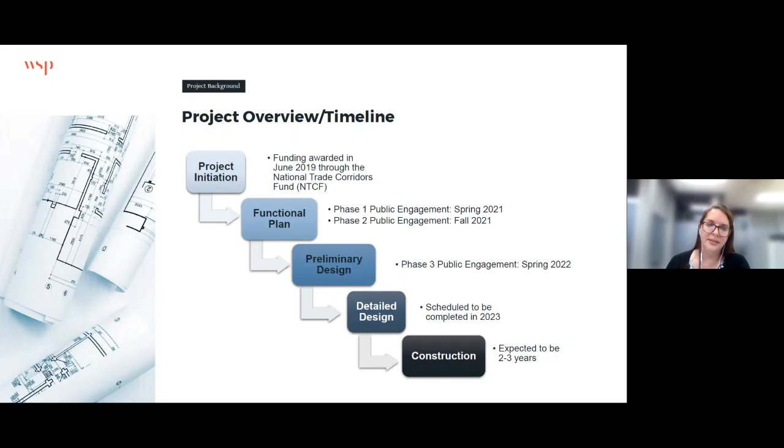We will gather feedback on the preliminary design before moving forward into detailed design. The detailed design will be completed in 2023, and this involves the details of where infrastructure will be located and the development of construction drawings. Construction is expected to take 2 to 3 years, and we are planning to begin in 2024. Details on construction timelines and impacts will be shared after the design is completed.

I'll now hand it over to Jenny Lugar with WSP to share a bit of the project background.

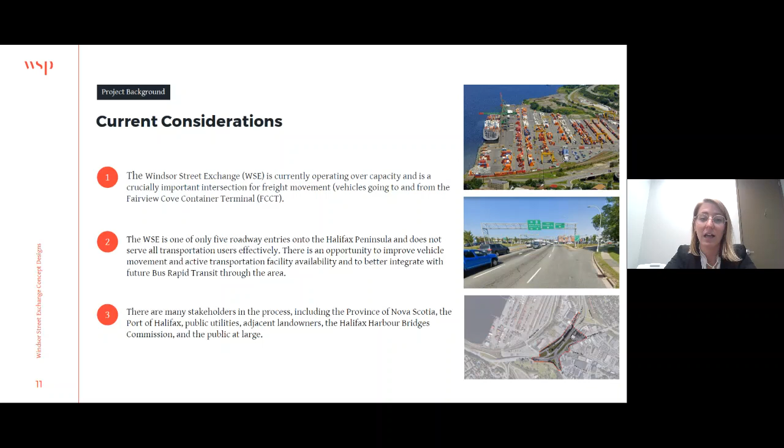Third, there are many stakeholders in this project, considering the different landowners and interests around the area — including the Province of Nova Scotia, the Port of Halifax, public utilities, adjacent landowners, Halifax Harbour Bridges Commission, and of course the public.

Here is our project study area. It has two key intersections. The first is the Windsor Street Exchange, where the Windsor Street ramp to the McKay Bridge meets the Bedford Highway, meets Windsor Street Exchange, and meets Lady Hammond Road. There's a secondary intersection we're looking at here at Lady Hammond Road and Kempt Road.

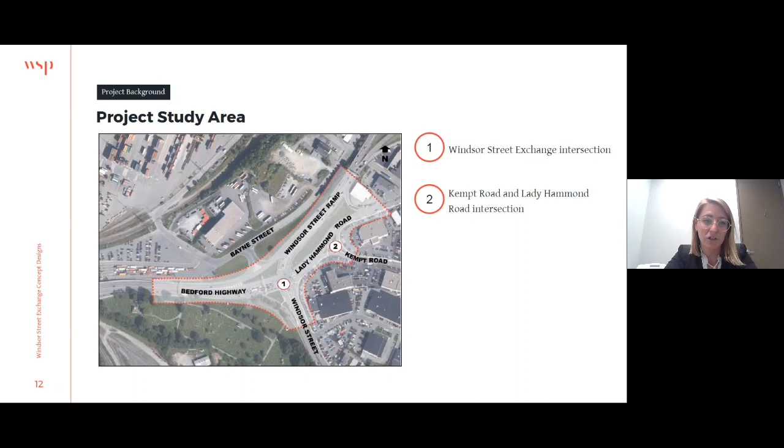As you'll see when going through the options, there's a third intersection that comes into play once we look at the usable area for this redesign — the Bayne Street intersection, where the Windsor Street ramp and Bayne Street intersect.

The scope of the study is fairly broad, balancing many different objectives. First, how to improve safety for all road users — people driving, walking, cycling, carrying goods. Next, how to improve efficiency and functionality of this intersection for vehicle and goods movement. Third, how to enhance user experience and safety for people walking, rolling, and cycling. We recognize this hasn't exactly been a user-friendly or safe experience for many people.

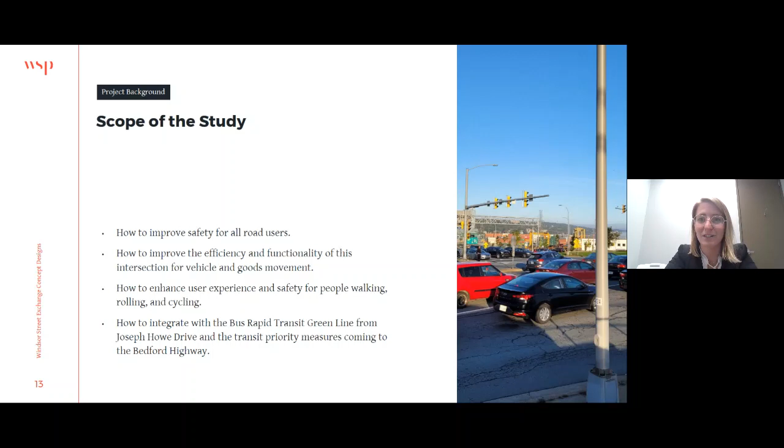And finally, how to integrate with the Bus Rapid Transit Green Line from Joseph Howe Drive and the transit priority measures coming to the Bedford Highway. So there are lots of competing interests here, and we're doing our best in the options to balance both — you'll learn more about that in a few minutes.

Regarding project integration, this is important because this intersection connects to many different parts both on and off the peninsula. First is the Bedford Highway Functional Plan, endorsed by Regional Council in 2020; HRM staff has been proceeding with the design to establish a formal right-of-way based on the balanced modes option — similar to what we're looking for here, a balanced approach. The Windsor Street Exchange project will connect to the Bedford Highway to meet the objectives of both functional plans, keeping in mind roughly where these two projects meet in their scope areas.

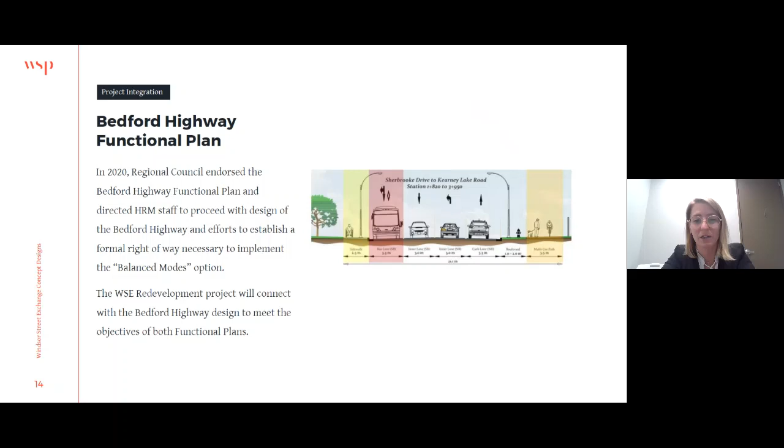The next is the Rapid Transit Strategy, also approved by Council in 2020. It aims to provide bus riders with fast, frequent, comfortable, and high capacity service. As I mentioned earlier, the BRT Green Route will run through the project, integrated with it, and will eventually run through the new Windsor Street Exchange.

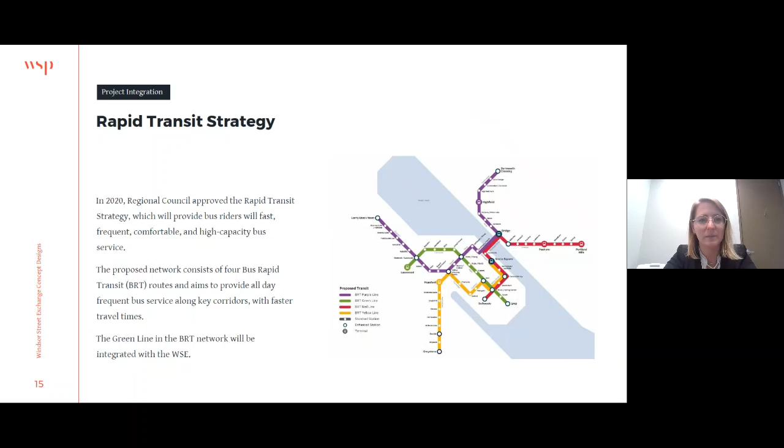Africville Active Transportation Connections project is an ongoing project that, due to its proximity to the Windsor Street Exchange, is being considered in tandem, which has been a great advantage.

Initially, this project looked at 3 potential routes and did some preliminary engagement with the community. Further engagement is ongoing right now. The project team has narrowed it down into a preferred route and is looking for feedback on this route. There will be some further discussion later on about how to potentially connect into Africville from our subject site for the Windsor Street Exchange.

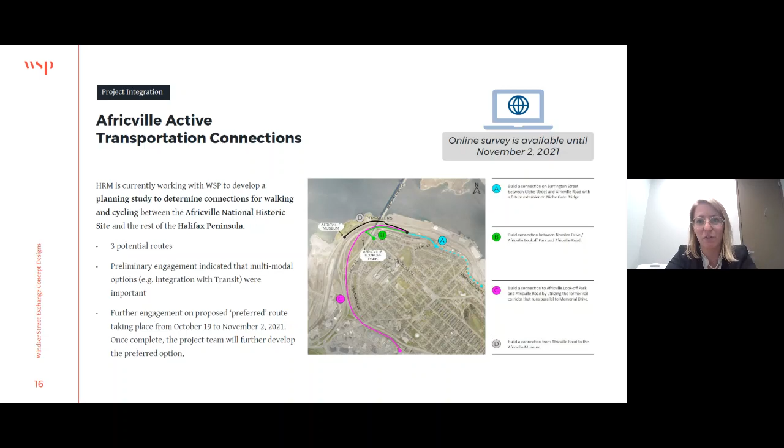But for this project specifically, there is an online survey available until November 2nd. That's available on the Shape Your City page, which can be accessed through the Windsor Street Exchange Shape Your City page, which we'll have a link for at the end of the presentation here this evening.

So I'm going to review a little bit of what we heard from our phase 1 of public engagement.

We had really excellent feedback from the first round of engagement. We had 1,459 individuals contribute to the online survey, give us their feedback that way. We had 30 individuals who attended a virtual public open house similar to the one that we're having this evening. And we talked to over 20 different stakeholders, including groups and individuals who, based on various different interests, have a special stake in this project.

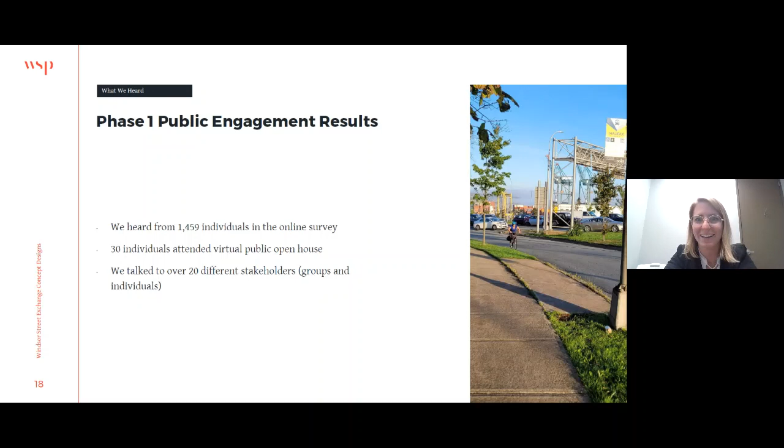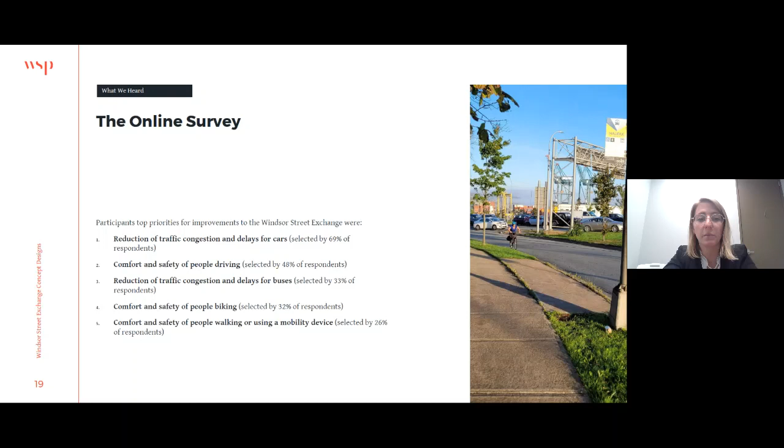In the online survey, we asked participants to rate their top priorities for improvements to the Windsor Street Exchange. In order, those were: reduction of traffic congestion and delays for cars, the comfort and safety for people driving, the reduction of traffic congestion and delays for buses, the comfort and safety of people biking, and finally the comfort and safety of people walking or using a mobility device.

We also asked participants in the online survey in the last round to look at trade-offs and how you might balance all these different modes that are competing for space and for priority through the Windsor Street Exchange, in recognition that there's a finite amount of space in this area and there's a limitation to what types of modes we can accommodate with this finite space.

When asked this question, 43% of individuals who responded to the survey were in support of increasing or maintaining private vehicle travel times in order to improve bus travel times. 46% were in support of increasing or maintaining private vehicle travel times in order to improve safety and comfort for people walking or using mobility devices. 42% were in support of that trade-off in order to improve safety and comfort for people biking. And finally, 32% were in support of increasing or maintaining private vehicle travel times in order to improve travel times for the transportation of goods.

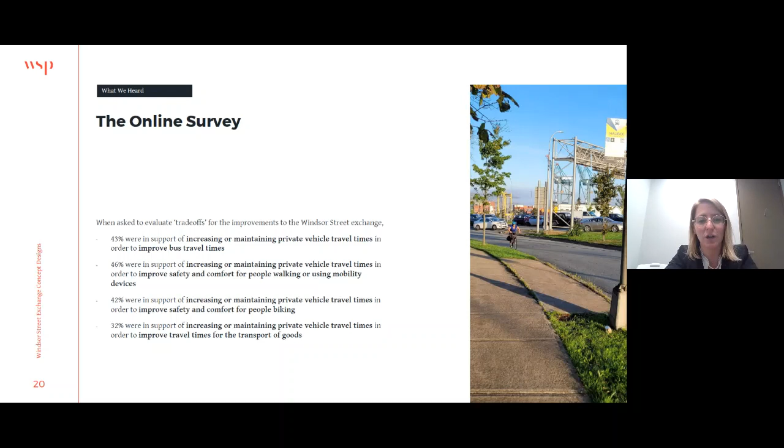That helps give us an idea of where we might allocate different attention and priority, and that's going to be looked into further with the project team as it advances, once we're narrowing down the different benefits for each option.

There was also an opportunity on the Shape Your City webpage to participate in an online mapping survey. This survey allowed us to collect geospatial or geographic data in order to understand specific pinch points, areas of concern, that sort of thing.

The feedback we got from that was significant, but a lot of the common themes were: some participants felt the project should increase safety for all users, while others felt that private vehicle movement should be prioritized as that's the highest volume user in this area. And then others felt that on the flip side, vulnerable users like active transportation users—people walking, biking, rolling—should be prioritized due to their vulnerability.

Another common thread was that better signage and infrastructure is needed at the Windsor Street Exchange, so directional signage and infrastructure in order to meet different needs for people traveling in different directions, and we will address some of how our options have addressed that later on in the presentation.

The third was that individuals who walk, roll, or bike rarely use the Windsor Street Exchange due to the lack of safe infrastructure. This was brought up a couple of times in the online survey as well.

Individuals were asking the project team to keep in mind that we may not get the feedback we're looking for in terms of the volumes of people who are walking, rolling, and biking because of the state of the infrastructure right now. And there was hope that the project team would be aspirational in hoping to get more people able to walk, bike, and roll through this area.

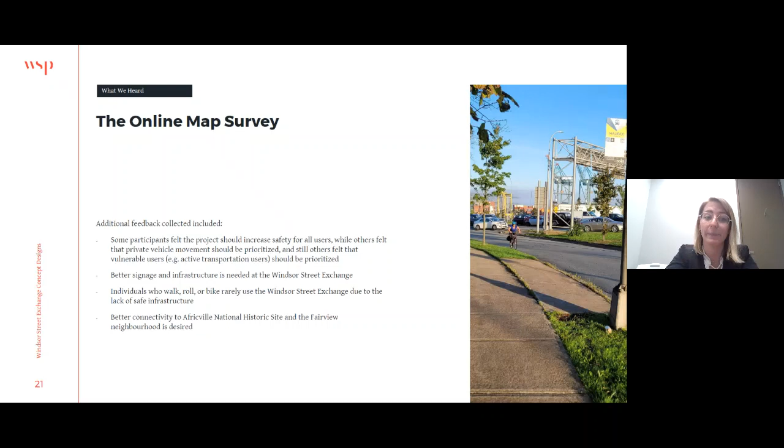And then finally, better connectivity to the Africville National Historic Site and the Fairview neighborhood were two things that came up a fair bit when we were looking at locational data for this project.

I believe this is a repeat. Could you go to the next slide, please? No, it's not. Okay, sorry.

Good evening, thank you Jenny. I guess what we've been waiting for is to see what we've been working on since the meetings mentioned earlier in the spring. As was mentioned, we have two options we're presenting this evening. So what I'll do is walk through the first option, what we're calling option A. Very innovative naming.

Before we got to option A, we did look at a lot of different concepts. We met with the HRM project teams and reviewed different ideas for improvements to the area to separate different traffic flows. A few of these are presented here that we looked at during the concept stage, looking at traffic volumes to see what would work and what would physically fit in the area. An interesting one that showed some promise was a displaced left intersection that moves a lot of the heavy volumes away from the main intersection, but keeps everything without overpass structures. That did require a lot of land, which was quite constrained in this area. Some other larger options were grade separated with bridges to separate some of the higher volume movements, really seeing what other options would work to fit into this area.

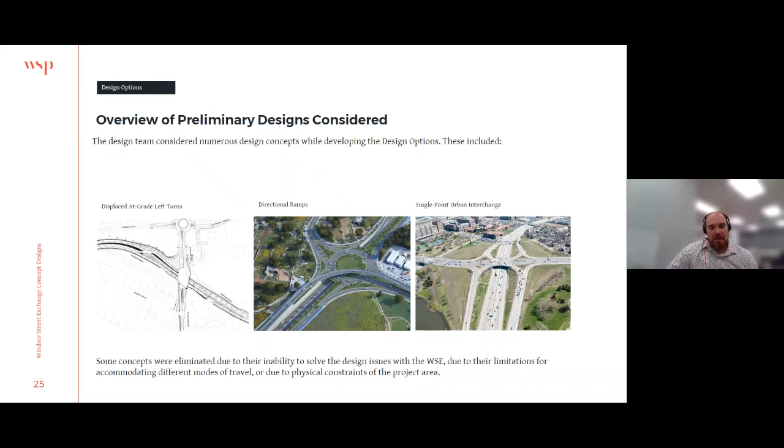The two options we're presenting this evening were really a combination of some of the features that were working well from the concepts we worked through, and some of the areas where we had other challenges, pieced together to get the two options we're presenting this evening. So now, option A.

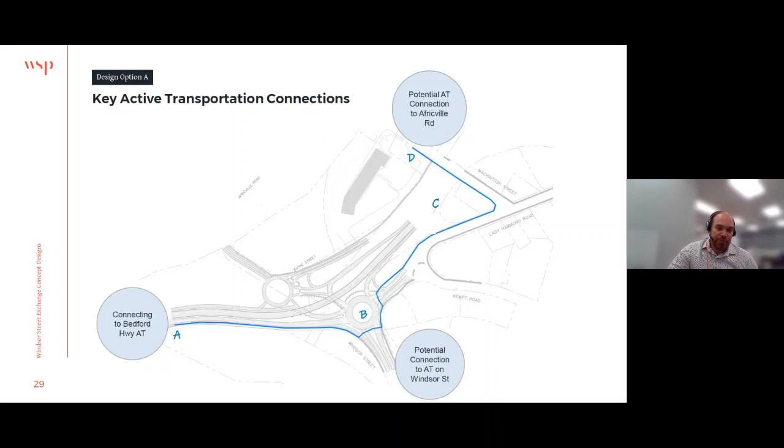Special attention to the BRT corridor that's being planned and what kind of improvement options and enhanced features could be accommodated for that. We don't have a lot of those to present this evening regarding exact transit priority measures, but that will be flushed out over the next phase of this project.

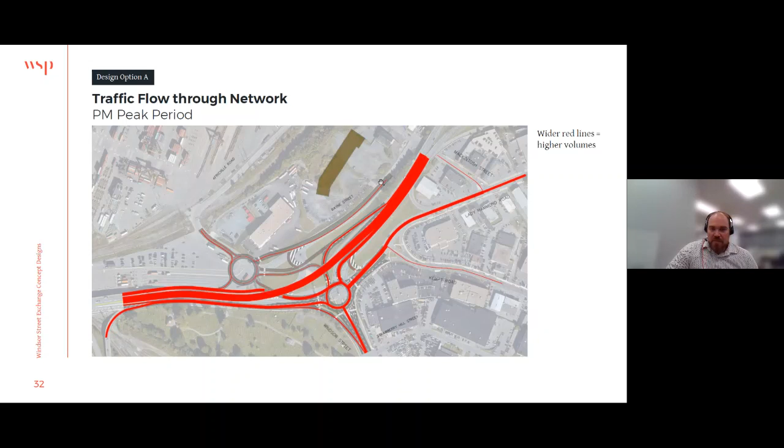So the next few slides will walk through some of the key movements, just to help describe how traffic flows through this area. They might be a little repetitive, but I'll walk through this first one so we can get a sense of how we describe these movements.

I think there are about six pairs of these movements we can go through, and I'll walk through them just to show how all the major movements through this area are accommodated.

To get from Bedford Highway to and from Windsor Street, we travel A to B—continuing along Bedford Highway and turning right to Windsor Street, very similar to existing. To get back from Windsor Street towards Bedford, you start at C, turn left at the roundabout, get to E, go underneath, bypass the second roundabout, and you're on your way.

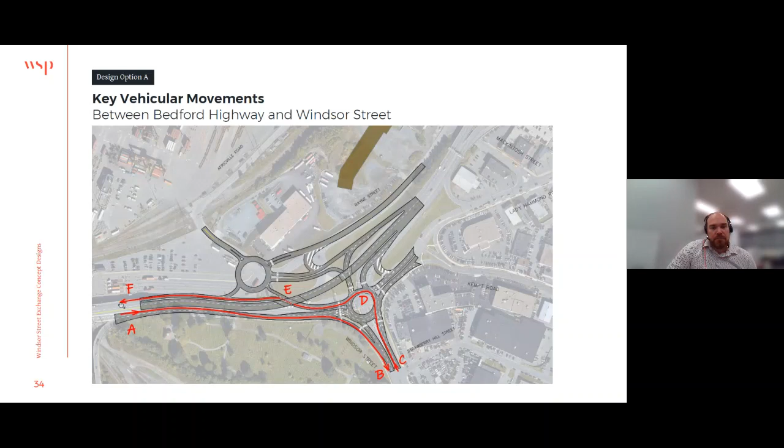There are two options I'll describe for the eastbound movement here. If we start at A, coming from Bedford on the Bedford Highway, and we want to go to the MacKay Bridge, for example, we would travel from A right through the middle of the corridor without stopping anywhere, end up at C, and continue on to the MacKay Bridge or to Robie Street, Barrington Street, etc.

If we're coming from the Joseph Howe ramp at A, the grade separation component of the structure begins in that area, so you cannot actually get from the Fairview ramp onto the overpass bypass section. That does a couple of things as well—it improves some of the weaving that currently happens in that area.

Right now, a lot of traffic that travels up that ramp wanting to go to the MacKay Bridge has to weave across lanes of traffic, while at the same time traffic from Bedford is weaving to get over towards the Kempt Road, Lady Hammond, Windsor Street approaches.

So to get to Dartmouth from the Joseph Howe ramp, you would continue along the Bedford Highway at the same elevation as the cemetery, get to the roundabout at Windsor Street, turn left at the roundabout, and continue on your way. The grade separation portion removes a lot of the traffic from that movement that you currently see with the traffic signals in the left turn—over half of that left-turning volume is separated onto the bypass road, which helps facilitate this option.

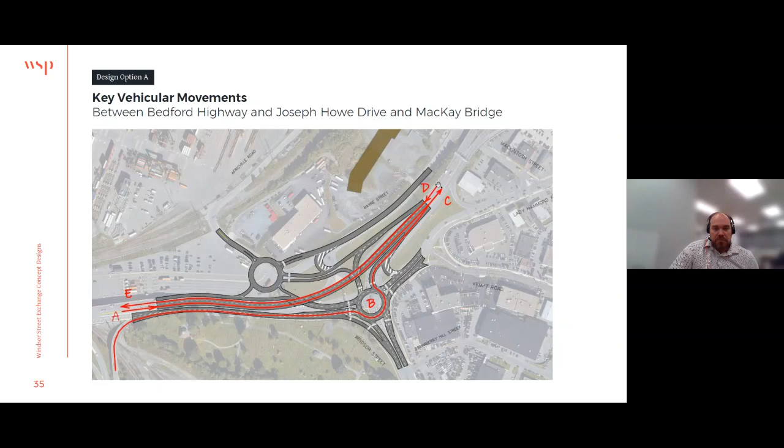I think we just have a couple more movements. I guess one of the drivers for the project is how do we get to the Fairview Cove container terminal, and more and better connected for the goods movement and the trucks traveling in and out of that area.

So we'll start with that area and Africville Road if you want to get to the MacKay Bridge. This is where the second roundabout at Bain Street comes in. If you start at A, you get to the roundabout at Bain Street at B, you travel straight through that roundabout and get over to the roundabout at Lady Hammond Road, Bedford Highway, complete a left turn, and you're on your way to Dartmouth at D.

To get into the Fairview Cove container terminal, you start at E, take a ramp to get off the part that's bypassing, continue straight to the Bain Street roundabout at F, go straight through at G, and then you're at your destination.

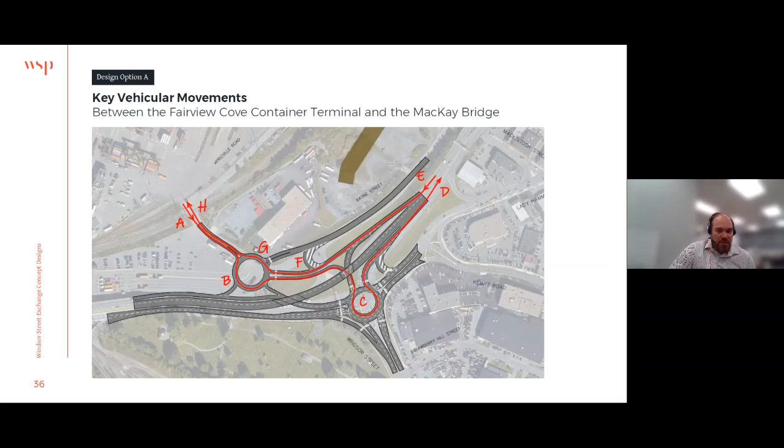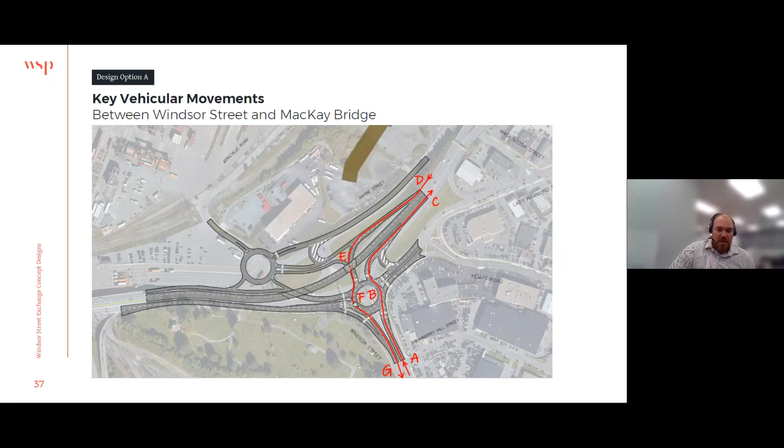This one is Windsor Street to MacKay Bridge, so it's pretty straightforward. If you want Windsor Street, you go A, B, straight through the roundabout, and C, you're on your way. To get back, you start at D, at E you go underneath the higher volume movements, at F you go straight through at the roundabout and continue on to Windsor Street.

I know this might sound complicated trying to show everything at once, but really anybody just needs to know what to do to get from point A to point B. In this case, to get to the container terminal, start at A, turn left at B - and remember, previously we could have bypassed to continue on to the Bedford Highway at that point - but we continue on to the circle at C and go straight through that roundabout, and you're at the container terminal and Africville Road.

To get out of there, it's very similar to today. You basically just make a right turn onto the Bedford Highway.

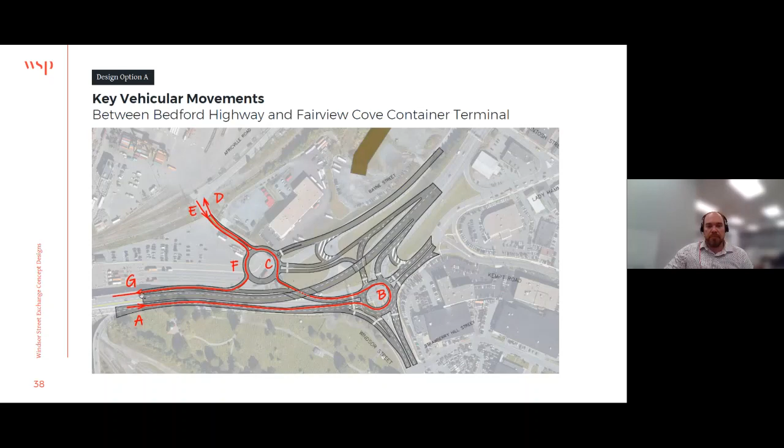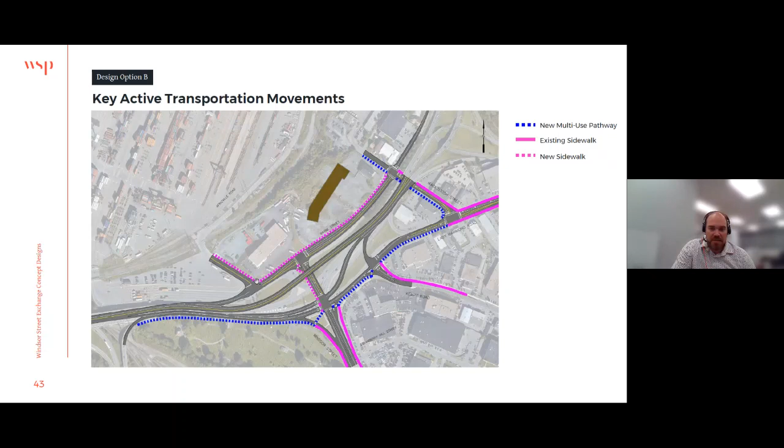Similar to what we looked at for option A, this makes sure we are connecting to active transportation facilities planned on the Bedford Highway. Bike lanes or other future active transportation facilities on Windsor Street can be accommodated with this option, and there will be further options looked at to connect from E towards Africville Road and further north to fill in a gap in the network in that area.

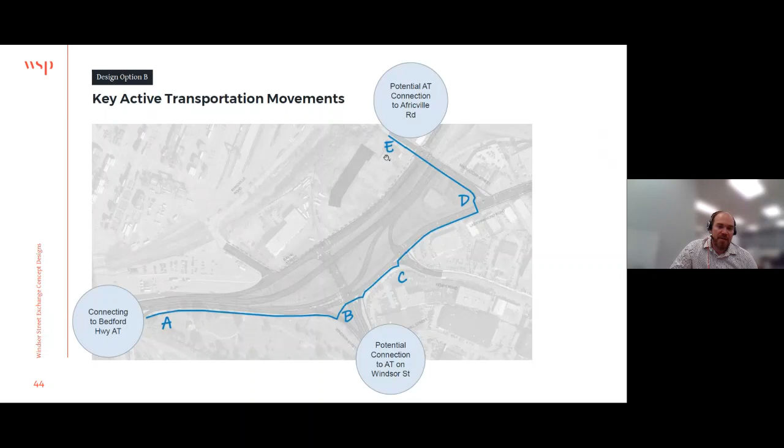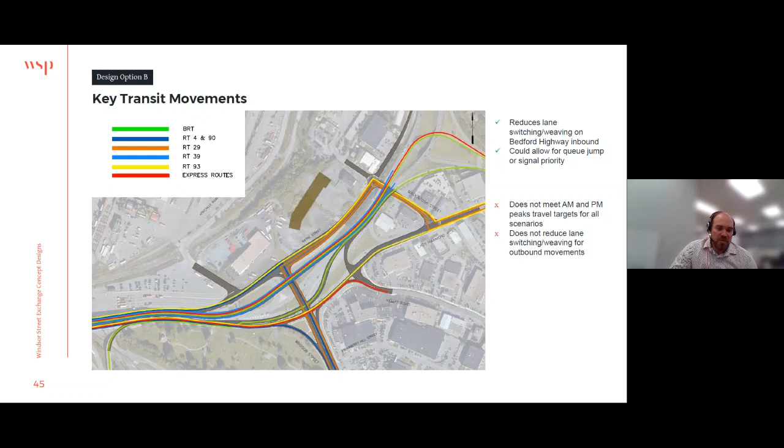This is an important node for getting transit movements through. This map shows all the different transit routes that currently use it, plus the proposed bus rapid transit route that travels from Joseph Howe Drive, over to Massachusetts Avenue, and onto Robie Street. It's accommodated through this area, and as we move further through the design, we'll be considering options to enhance and improve travel times through the area for transit movements.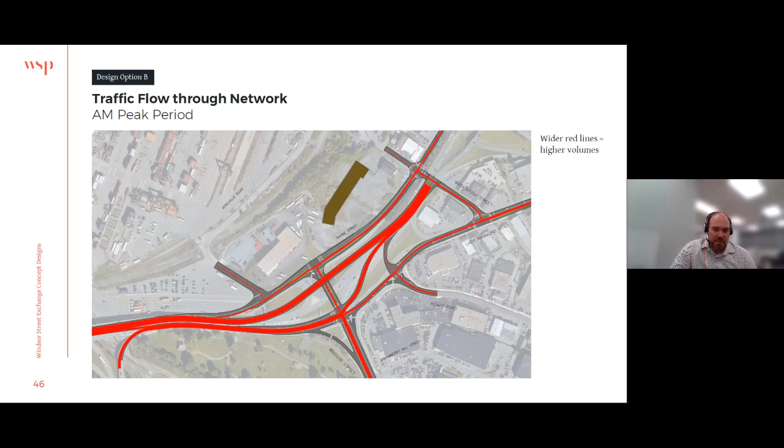The key feature of this option is the grade separation, with the thickest line traveling over top of Windsor Street, right in the center, removing some of the higher volume movements from the main intersection. In the PM peak, Bain Street gets even a little busier, and I'll explain that as we look at the different movements. In this option, Bain Street is used to get to Windsor Street and to the container terminal.

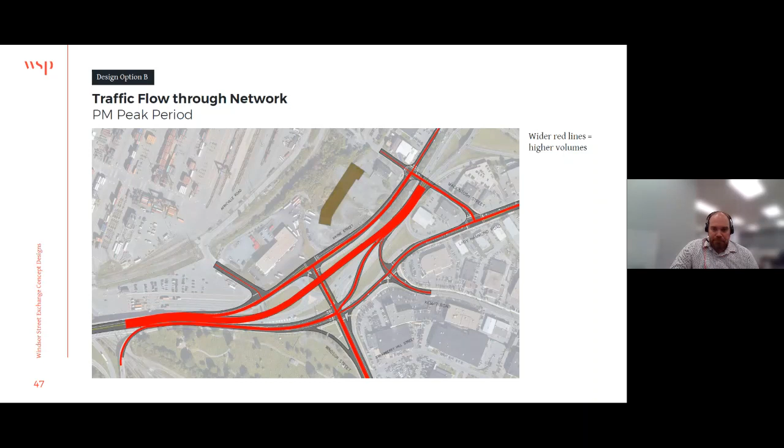The exit coming from Dartmouth would be just off this plan to the north, so we'll see that when we go through the same traffic movements we had seen before. We'll walk through the same 6 key movements through the area -- how do you get through it now, and how will this option impact that?

If you're going from Bedford Highway and traveling towards Lady Hammond Road, starting at A, it's really similar to existing -- you continue on at B and C through the Windsor Street intersection, cross the signalized intersection at Kempt Road, and continue on.

The difference from existing for this option is between C and D on this image: one way eastbound, one way towards E. So if you want to go from Lady Hammond Road towards Bedford, at F you would turn right down MacIntosh Street, at G turn left onto Bain Street, at H travel through a signalized intersection, continue past Africville Road at I, and then continue on to J. That's why we're seeing more volume on Bain Street -- it separates the eastbound movement on C and D from the outbound movement on the G and H side of this image.

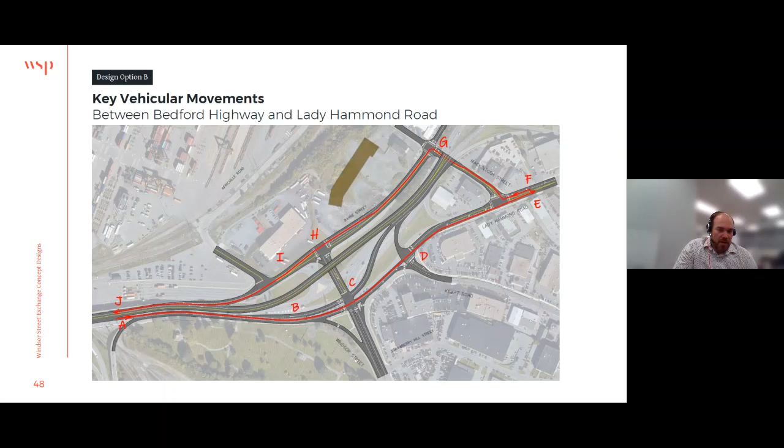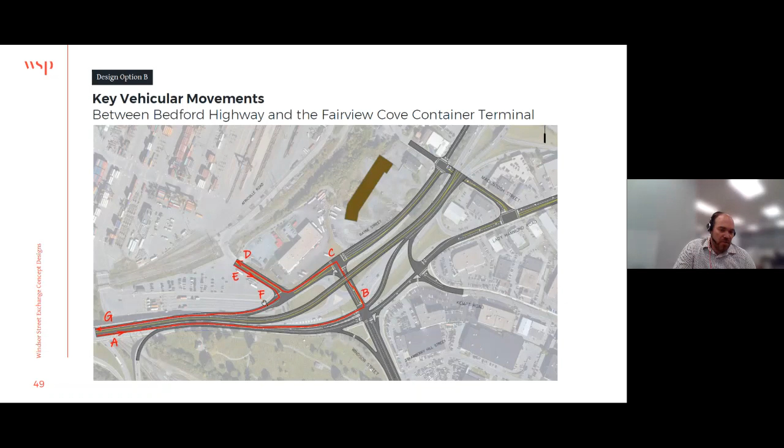I'll go through the rest of the key movements. One of the objectives is to connect the container terminal -- how do trucks get into the container terminal from Bedford Highway or Joseph Howe Drive? At A, continue over to B, which is Windsor Street, turn left at a signalized intersection at C, turn left at another signalized intersection, then turn right towards D. To get back towards Bedford and Joseph Howe Drive, you just take a right turn and travel towards G on Bedford Highway.

Between Joseph Howe Drive and the MacKay Bridge, you come up the ramp at A, continue along to the signalized intersection at B, travel straight across the signals, and at C continue on towards Dartmouth. This is where the grade separation component comes in -- if you're coming from Bedford at A, you'd be able to stay on the grade separated portion and continue right on to C without going through the intersection, moving a significant volume of traffic from the intersection.

This really makes the intersection more of an urban intersection. We heard some comments about pedestrian overpasses on the last option, but removing and reducing the size of the intersection as much as possible is what we're aiming to do here. To get from Dartmouth towards Bedford, it's again grade separated, so a very straightforward movement -- you travel from D to E.

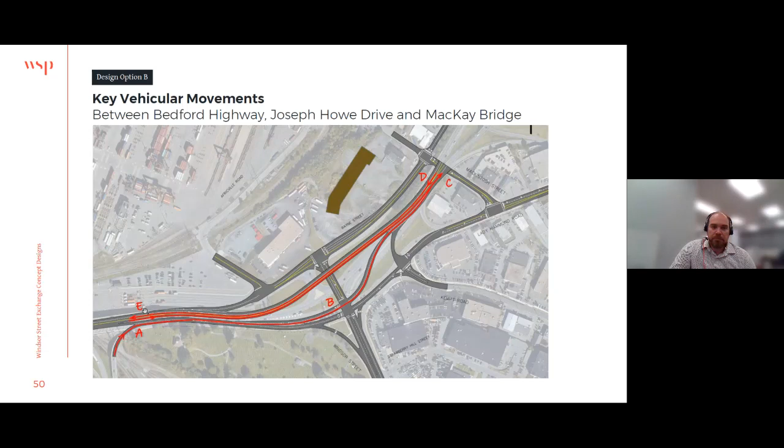Now the movements into the area to get off to Windsor Street or other streets, towards the Fairview Cove container terminal, you actually exit the facility from Barrington Street and the MacKay Bridge a little bit sooner than the option A we just looked at. So at F, that's an existing section of Bain Street, near where the ramp that takes you to Robie Street, just north of here, turns off. We would have another lane that also exits onto Bain Street, getting that into the network at F. We continue across MacIntosh Street at a signalized intersection, travel towards a signalized intersection at H, and then turn right onto Africville Road towards the Fairview Cove Container Terminal at J.

To get back to Dartmouth from the area, you start at A and turn left at B. You travel a little ways on Bain Street, turn right onto Windsor Street, and then at a signalized intersection, you turn left onto the ramp that takes you up to E and towards Dartmouth.

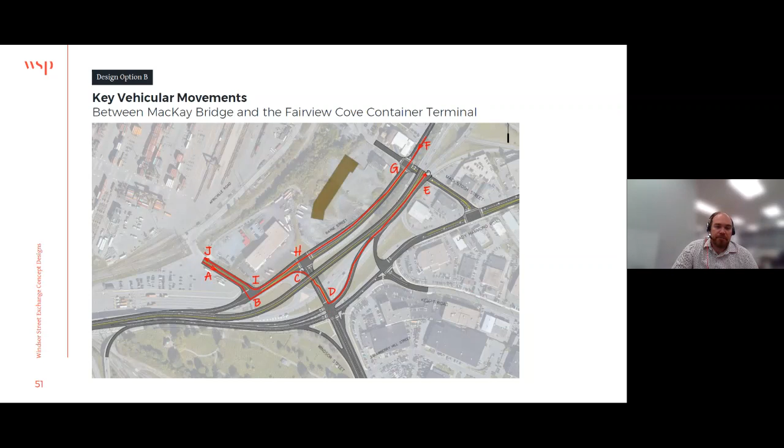Just a few more of these movements to go through. This one is Windsor Street to between Windsor Street and Bedford Highway, so A to B, very similar to existing. Travel along Bedford Highway, turn right onto Windsor Street. To get back, you travel north on Windsor Street, straight through the intersection at D, a signalized intersection. You complete a left turn at Bain Street and continue on to F, and you're on your way to Joseph Howe Drive, Bedford Highway.

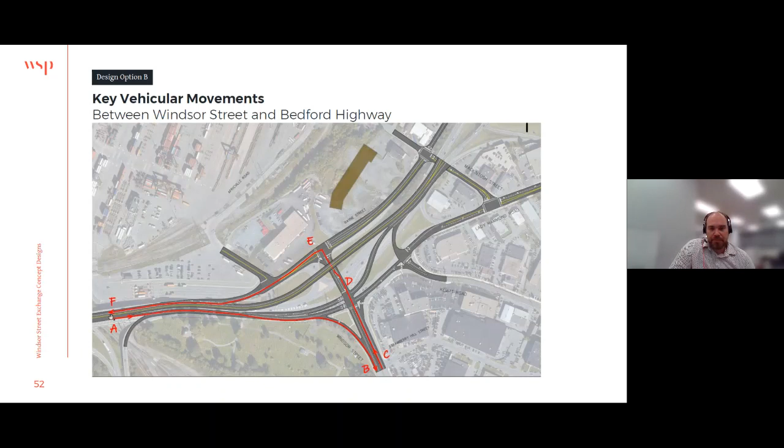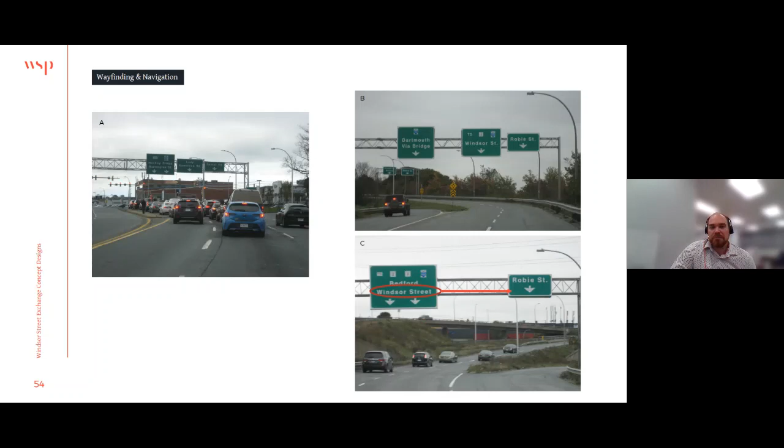So I'll turn it over to Jenny to get a few more thoughts on what we just saw for option B.

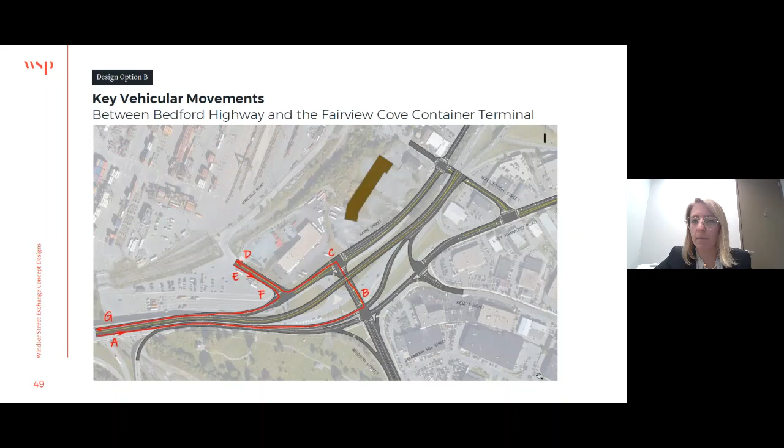Okay, so we've got one here, which is provide separated bike lanes and sidewalks versus multi-use pathways, so separate out people biking and people walking.

This is kind of a comparison, but I think it's relevant here. Option A has incorporated principles of roundabouts, which are safer and more efficient than traditional intersections found in option B, so an improvement to option B would be incorporating roundabouts.

This also features an active transportation pathway that doesn't connect to the heart of the city. It'd be nice for bikes to be directed to the core. It'd be great to have a little more information on which direction you mean.

If there are really no options to provide separated bike lanes and sidewalks, make the multi-use pathways the maximum recommended width of 4 meters. Okay, that would be an improvement someone's looking for.

Provide dedicated BRT lanes for some of the routes. Okay, that's an improvement. Fewer or no crosswalks. Priority should be focused on active transportation to encourage the mode and provide increased safety and sense of security. More direct travel for active transportation would be great, as inefficient paths will discourage this mode of travel.

There are some questions here. A recommended same improvement as for A, protected cycling infrastructure connections to other AT infrastructure. As mentioned, that's definitely something we're keeping in mind, connecting to other AT infrastructure.

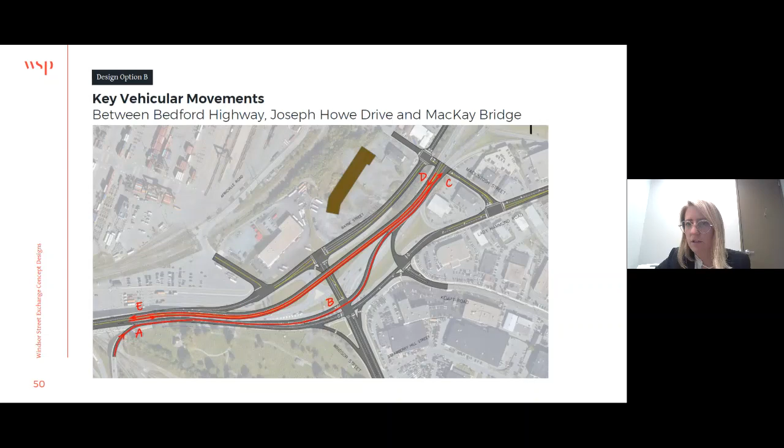So we're going to move on to a comparison of these two options. I believe, Deanna, if you want to, or I guess an evaluation of these two options - I'm going to go through this with everybody. Next slide, please.

So we looked at all the different criteria that are informing this project in order to help us balance all these different competing interests that we have for this project. And what we've done here is a fairly high level evaluation of the two different options based on these criteria.

Of course, this is going to get narrowed down into a more precise evaluation of the two options once we have a little bit more precision on what the design looks like for each. We wanted to bring it at this early stage so that we could get that feedback and make any necessary adjustments before we get too far into the process.

So for option A, some of the benefits are that the active transportation connection to Windsor Street, Lady Hammond Road, and the Bedford Highway has been introduced and significantly improved from existing. There's a grade separation of the high volume movements, which reduces the at-grade vehicle conflicts. So that overpass that we were looking at, which is presented in both options, allows vehicles to travel directly from the Bedford Highway to the MacKay Bridge.

This option provides direct access between the Fairview Cove Container Terminal and the road network in all directions. This option separates the Bedford Highway and the Joseph Howe approaches to reduce the need to lane switch or weave. That was a really key consideration from the public engagement that we heard — that the lane switching when trying to travel from Joseph Howe Drive over to the ramps under the MacKay Bridge was something that was concerning for a lot of people. This removes lanes that end abruptly on the Bedford Highway.

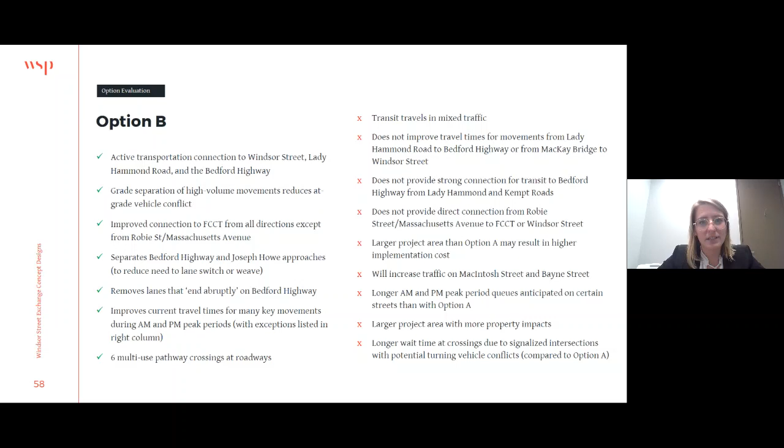In terms of summary and next steps for the project, as we discussed at the start, we completed phase 1, which saw us do stakeholder and public engagement and look at existing conditions. We've completed an operational analysis and confirmation of lane configuration, completed conceptual designs, and finally the designs you saw tonight, options A and B and their analysis.

We're currently at our final stage in phase 2, which is stakeholder and public engagement. More on that later. This evening is certainly not the only way to participate.

Following phase 2, we're going to be moving into phase 3, which brings us to preliminary design, looking at a more detailed version of the preferred design. So doing a bit more analysis of exactly what the benefits and drawbacks are of each option in terms of our different evaluation criteria for option A and option B, and then the project team will be moving the preferred option into a preliminary design level, at which point we'll be coming back out to stakeholders and the public. That is currently targeted for spring of 2022, so we'll look forward to seeing you again at that point.

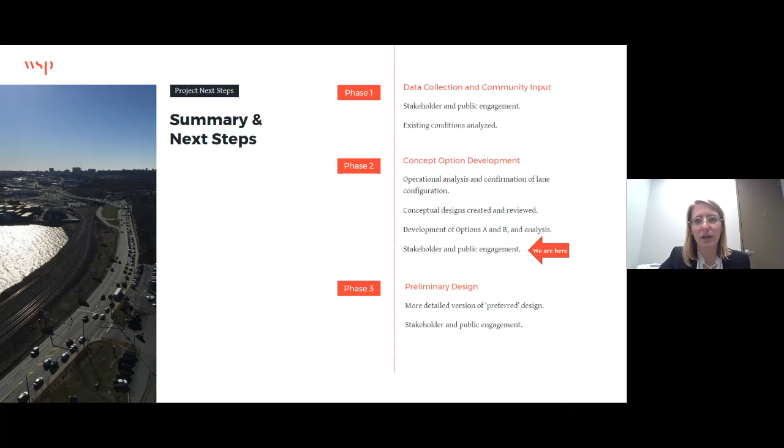I believe we're now going to move into the question and discussion period. We're going to put the instructions back up.

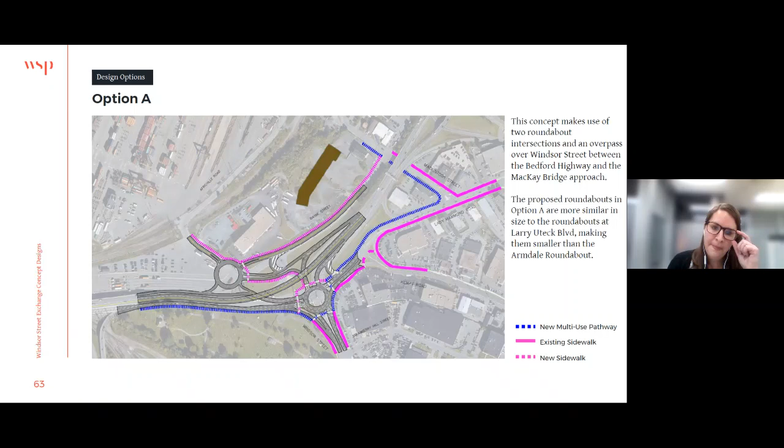Is there a traffic flow chart comparing the possibility of backups between both options? Traffic lights will cause a lot of backups, as far as I'm concerned, as I use the Larry Uteck roundabouts, and the traffic flows beautifully there no matter the time of day.

One of the next steps of what we're working on in the project is to get summarized... Greg's cut out there, but just give him a second to come back. I think you're good, Greg. Go ahead.

I think I had a beautiful answer for that question, but I think the question was on the traffic flow and queuing, really talking about Option B and the traffic signals. What we're working on is a functional design report, which looks in a lot more detail at the analysis than what we were able to present this evening.

But correct, with Bayne Street there is quite a significant volume and some delays and queuing there. One of the nice things about a roundabout sometimes is even when there is queuing, it's more of a moving queue. For the truckers, it might be a little bit easier to get into a queue that's moving slowly rather than a stopped queue where they have to stop and block traffic.

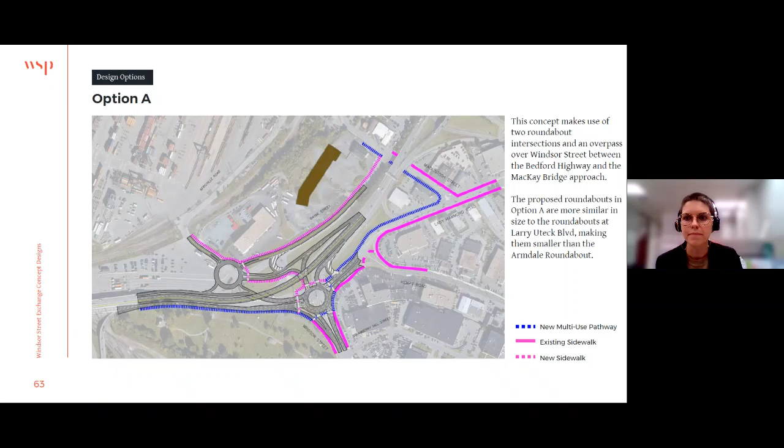Great, thanks Greg and Megan. So for the next question, I'll go back over to Greg.

Acknowledging the amount of land you have to deal with, you have determined lane configurations. Per your summary slide, have you determined multi-use path or sidewalk and bike lane configurations? So I think it's wondering—you've determined the configuration of the roadway lanes, but have we determined the multi-use pathway or lane configurations, Greg?

Sorry Mike, was that—how did we configure them, or have we? Yeah.

Looking at the land, if we look at the Bedford Highway portion that goes from the cemetery towards the north, you start carving off what is required to accommodate trucks, buses, cars, and active transportation. What we're showing right now, I believe, is in the 3.5 meter range for the multi-use trail along the Bedford Highway. Where the multi-use trail curves and travels down MacIntosh Street, it goes underneath an existing bridge, and there's a limited width there, so that portion of the multi-use trail we're currently looking at a 3 meter trail—along MacIntosh, at least in proximity to the bridge and the more constrained portion of MacIntosh Street.

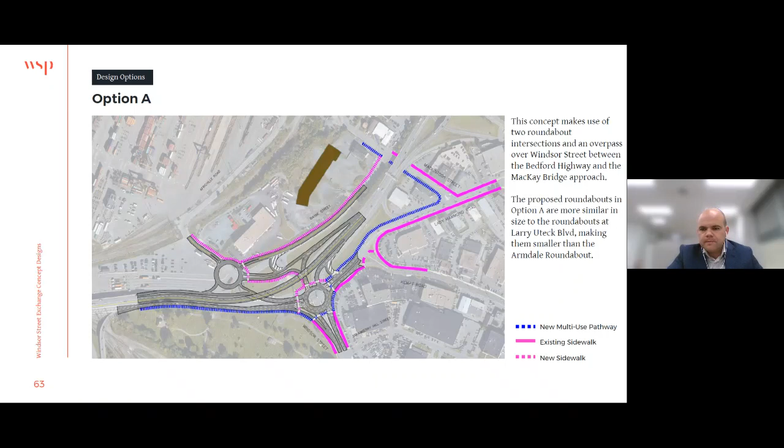A smart channel would be a right turn channel that operates similar to the way a roundabout does. Pedestrian movements and conflicts are dealt with by the driver first, who pulls up to the yield area and yields to traffic for the right turn. The smart portion is really the angle of entry. Similar to a roundabout, we've seen some right turn channels where you're almost looking out the back window of your car to see if you can yield and get into the traffic flow, and unfortunately in those situations you're not able to see the right corner of the car.

That's when it's not a good situation for pedestrians as well. Sometimes they get a lot of rear end collisions with another car, since you're looking behind you to see if there's a gap in traffic to pull out, and you can't really see that the car in front of you may not have already pulled out. So the smart right turn channel is really about the approach angles and design features.

So the option on the screen now, the only right turn channel we're really seeing here would be from Bedford Highway. What do those crosswalks look like? Those are really removed from where the yield point would be for the right turn bypass from Bedford Highway to Windsor Street, so it'd be more like a typical crosswalk crossing a single lane of traffic.

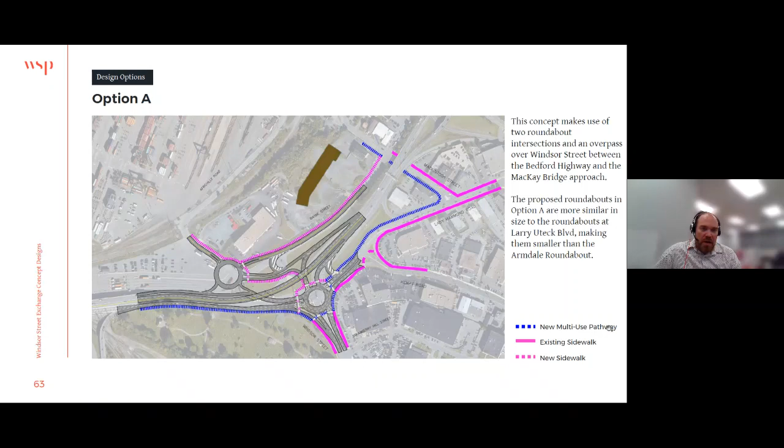Okay, thanks Greg. Going to take the next one to Megan. What impacts the local businesses besides the typical construction related impacts that we see with large construction projects? Can you comment on that, Megan?

Yeah, absolutely. Obviously this will be a major construction project with significant impacts while under construction. As I mentioned in the initial overview, we have to wait until we've finalized our preferred design, then we'll have a better idea of what the construction timelines and phasing will look like. We're expecting construction will take 2 to 3 years, and right now we're planning on beginning in 2024.